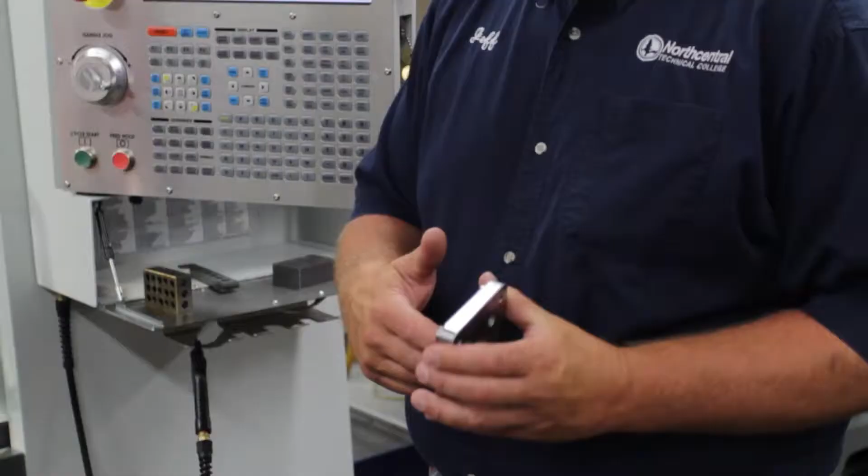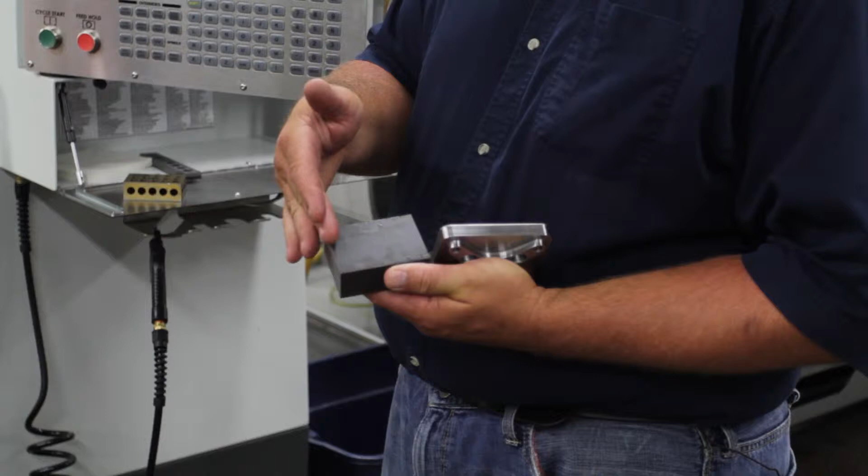Okay, this video will be going over the work offsets and the XY directions. I'll basically be covering 4 different types of origin pickups. We're going to go through a center of a hole. We're going to go through an edge of a block that would be finished. And then we're going to pick up off a rough stock, working off the center of the part, but also working off the edge, but offsetting the rough stock. And we'll go through that in a little bit.

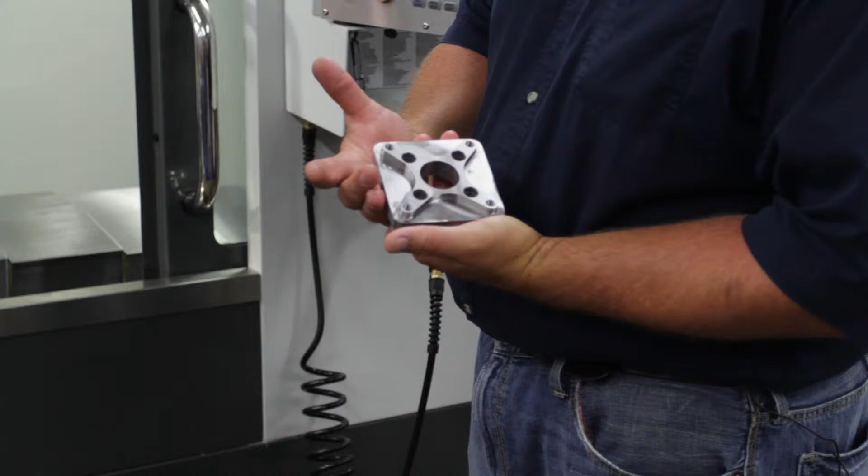First one we'll do would be the center of a part. Maybe we have a part that we already have and we have some more modifying to do. We have to drill some more holes and we want to pick up on the center of this part. The first thing you want to start with, obviously, is a square vise. Just like you have on the manual mills, you want to make sure you indicate your hard jaw in, make sure it's square to the machine. I've already done that, so we're going to skip that part today.

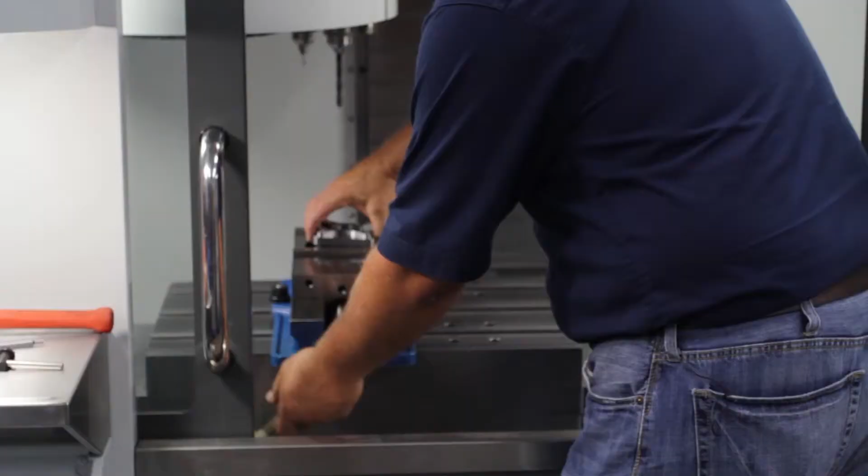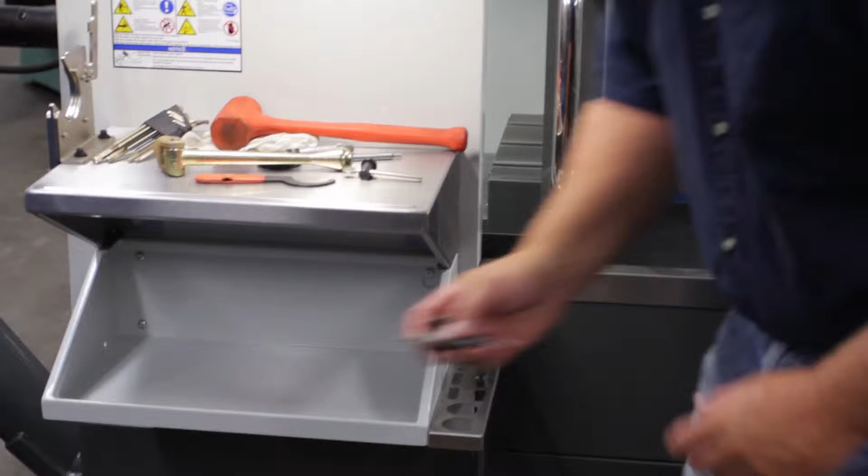So I'm going to mount my part in the machine, make sure it's nice and tight. And I'm going to use a drill chuck. You can use a collet, precision chuck, Jacob's chuck, but we're going to use the drill chuck. We're just going to mount our indicator in there. Just hand tight is tight enough.

And then we'll go into the machine, get into hand jog. We're going to move our machine into position. And I'm not going to do this just for the sake of the video. Once you get it in there, you're going to want to rotate your quill around until the dial reads 0 and it does not move. So once you have it into position and you have the center of that hole located, you want to go into your offset page for your work offset.

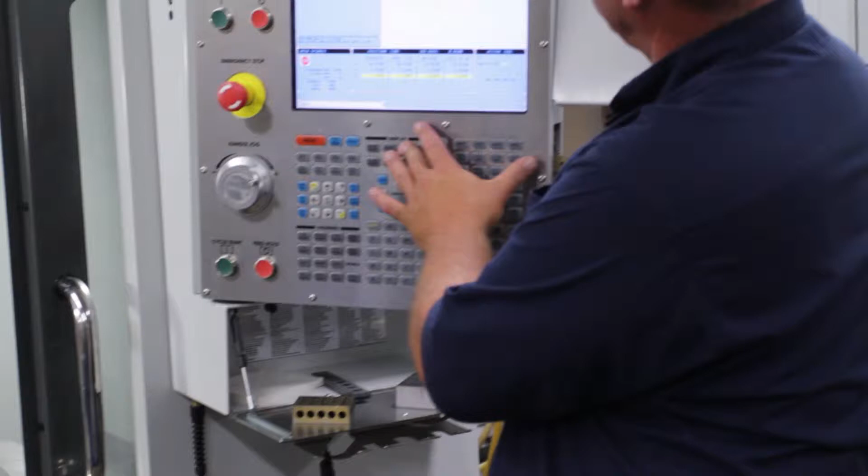Now in your program that you have written or you're going to write, you have to know what work offset number you're going to use. For the most part, we use G54. It's the most common one to use. So once we have the work offset page highlighted, you have the G54 and you have the X highlighted. You can rotate around using the arrow keys on which axis you want. So we're in the X axis and all you need to do is hit part 0 set. So that just set our X axis.

Now we're going to do the same thing for the Y. It automatically bounced over to the Y axis. We're still under G54. And now we're going to hit part 0 set again. So that would set your XY coordinate for the center of a part with the indicator where it is.

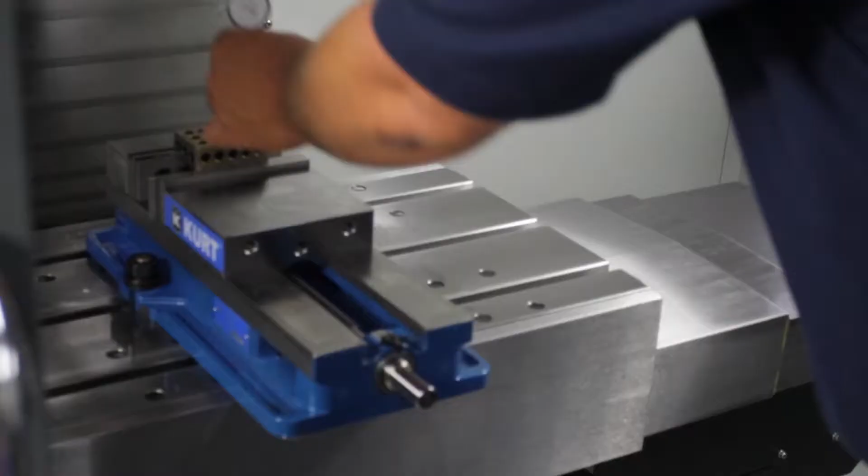So we're going to go ahead now. We're going to change up. We're going to do an edge find on a block that already has finished sides. So you mount your part in there. You can still use the same Jacob's chuck. And now we're going to use an edge finder. Here too, just hand tight is good enough. If you over tighten them, you end up breaking the edge finders.

Okay, so now we have to get our spindle rotating for this. If you had just turned on the machine, you probably can't just hit clockwise. It will not go. It needs an RPM in there. So the way you can do that is you go to MDI, type in a spindle speed, S800 for RPMs, M03, and you can input that on your screen.

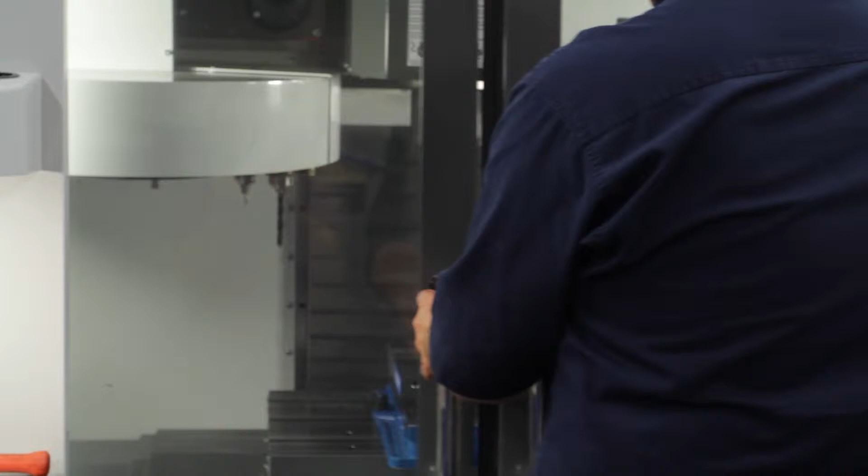And then once you have that, if you hit cycle start, it's going to tell you the door is open. So you do have to close the doors. And now we can hit cycle start. And our spindle turns on. Now in setup mode, you can open the doors and the spindle will maintain the 700 RPMs.

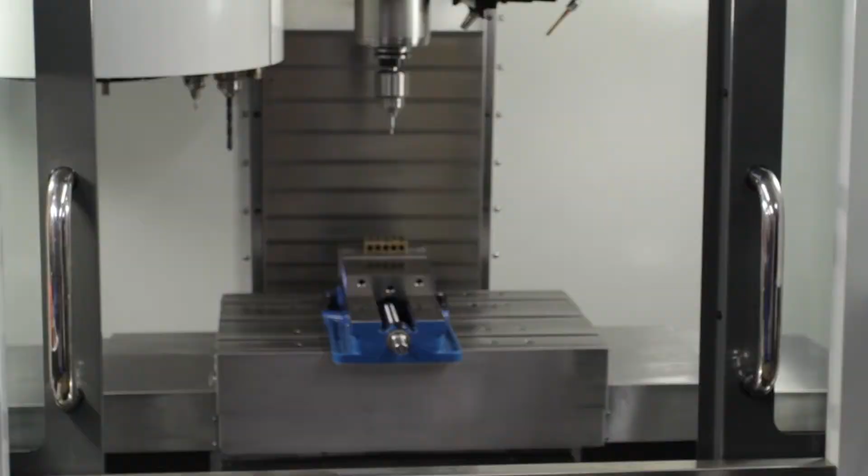Use extreme caution, safety-wise. You got a rotating spindle in there. You don't want to be doing anything that's unsafe. So you keep your hands away from the spindle. But from here, we can go into hand jog and we can move our edge finder into position. Careful not to bring it down on top of the part.

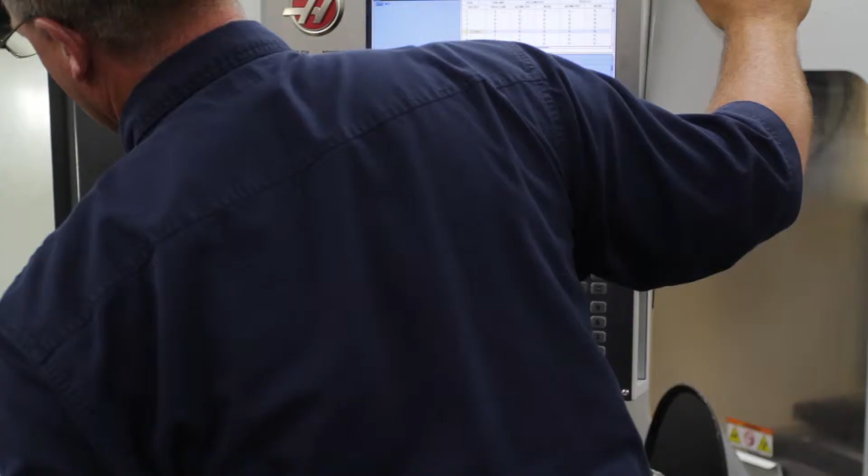Okay, so we're ready to do our X edge find. In hand jog, you want to be in the 1 thousandth increment, and then you go into the part until the edge finder kicks over. So there. So now our edge finder is just on the edge of the part, just like you have in all the manual machines. Once again, you're going to go to your offset page that displays your work offsets.

Now I'm just going to zero out our offsets from the previous part. So now we have our edge finder on our edge in the X direction. So here again, you want to be under G54 if that's what you have in your program. We're going to highlight the X. So now, once again, you're going to hit part 0 set.

So what that did is that set the center of our quill 100 thousandths off the edge of our part because of the 200 thousandths edge finder. Remember, you have to offset that 100 thousandths. It's always best to do that right away. There's two ways you can do it.

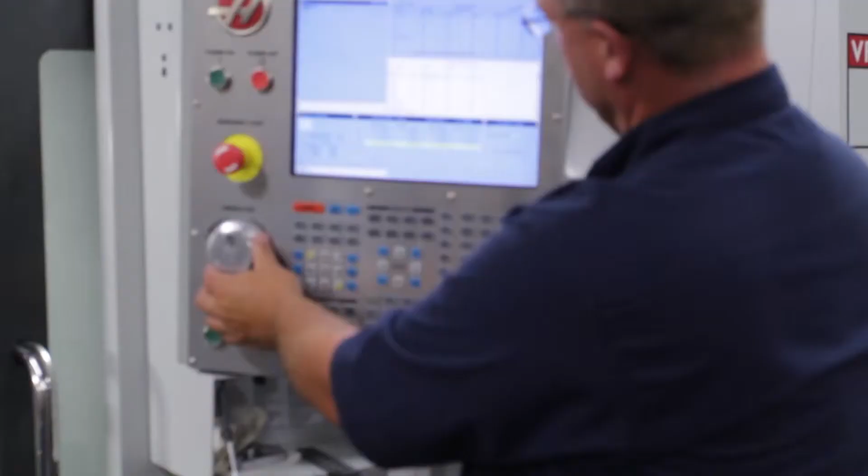You can lift your quill up and you can move your edge finder over 100 thousandths. Best way to do that is to go into 100 thousandths increment and just give it one click. Now you have to make sure you move in the right direction. So once you do that, you can hit part 0 set again.

The other way you can do it, the preferable way, I'm going to move back over. So that's right where the edge of our edge finder hit the part. You hit your part 0 set. And now you have to mathematically input the 100 thousandths.

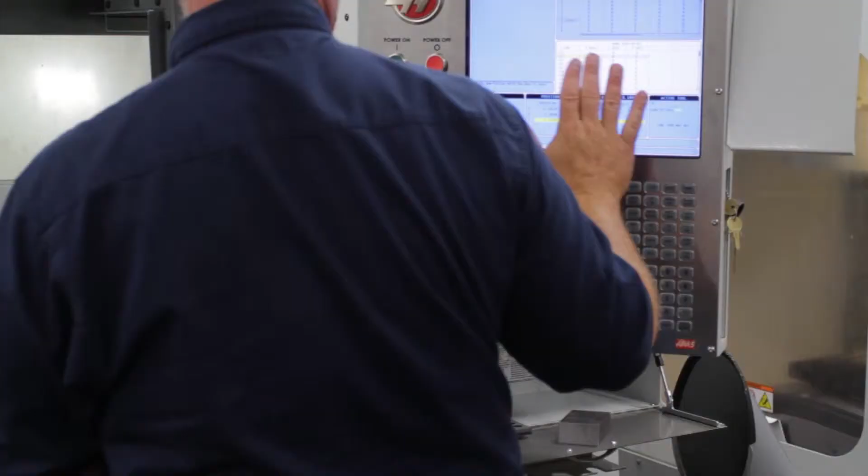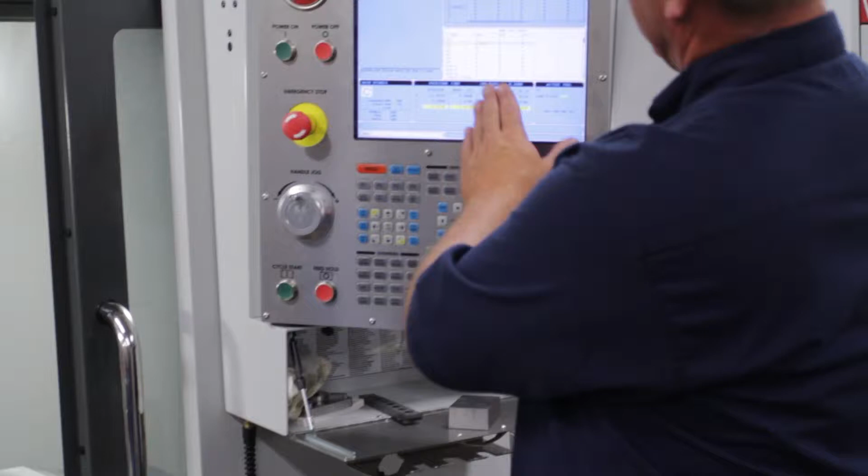Remember, this number, the negative 12.862, is off of machine home, which is up in this corner. So you got to think which way you want to move the quill. Do you want to move that quill closer to 0 or farther away from 0? In this case, we want to move it closer to 0, so we want to add 100 thousandths. So you have to make sure your axis is highlighted. And we're going to type in 0.1.

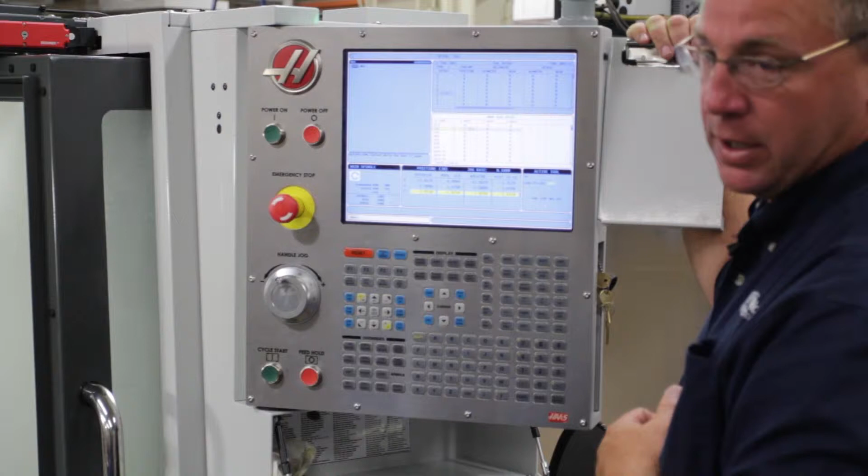And remember, this right enter button, that does the math for you. F1 would actually input 0.1. But in this case, we want the machine to do the math for us. We want to add 100 thousandths. So that just changed that to a negative 12.7620. Okay?

If our 0 is on this side of the part, we'd move our quill over until the edge finder hit. Once your edge finder hit, you do the same thing. You're going to hit part 0 set. Okay? Don't forget that this automatically jumps over, so you have to use your arrow keys to highlight the X.

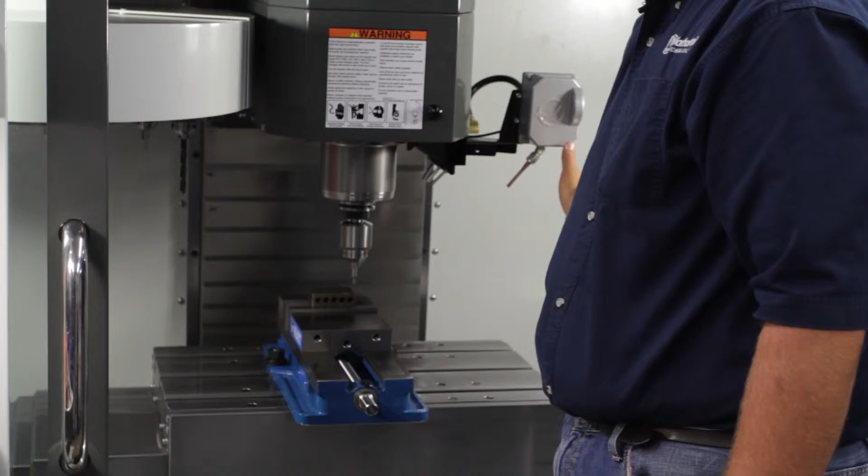But now this time we want that quill to move away from machine home 0. So we want to go farther away from 0. In that case, then, we have to subtract 100 thousandths. And you hit write enter, and it does the math for you.

The process is the same way for the Y direction. Bring your edge finder up. Sometimes it is helpful to hit it and get it out of center. Okay, so right there's our edge. So you go back into your offset page. If you're not on the work offset, you can just hit the offset button again, and it'll bring you right to it. Make sure you got G54 highlighted.

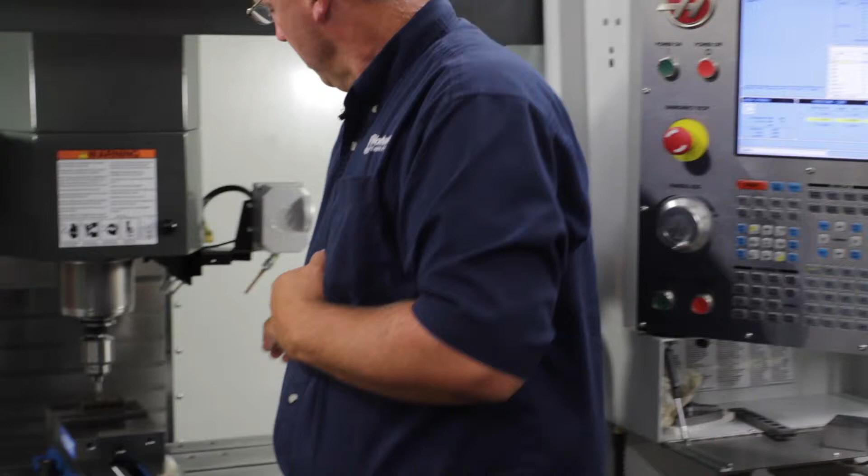And we're going to go to the Y axis. You hit part 0 set. Okay? So now we have to offset for the 100 thousandths for the edge finder. Machine home is up here. In this case, we want to go farther away from it, so we have to subtract 100 thousandths. Make sure our Y is highlighted. Minus 0.1, so we want to go farther away, and do the write enter. Okay?

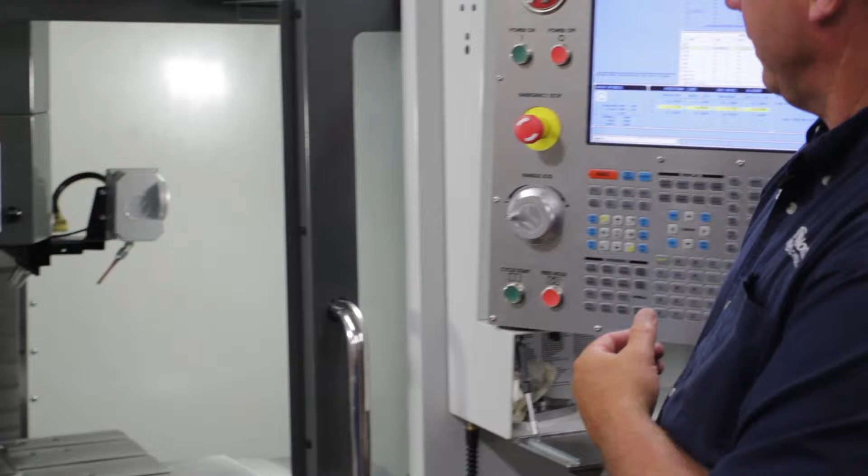If our 0 is on this side of the part, which generally you don't want to do, because remember, you always want your Y0 along your hard jaw. But let's just say for some reason it is on this side of the part. We'll work our edge finder up to it. Once it hits that out of center, you hit part 0 set. And now this time we want to go closer to 0, so we're going to want to add the 100 thousandths. So you go 0.1, write enter. Okay.

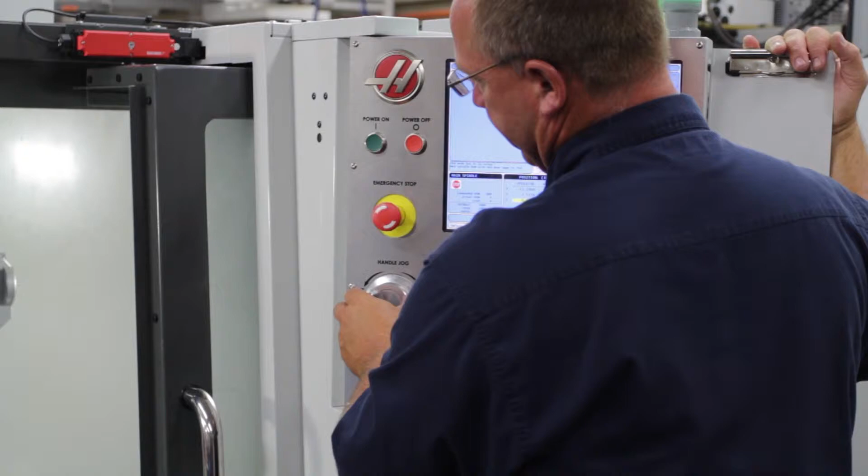So that's how you find your edge off a finished part. Now we're going to work with some rough stock. Let's change the part out here quick. So we got our rough stock mounted in our vise. First one we'll do is we'll pretend that the center of the part is our XY0. So you want to make sure you can offset your X and Y properly, so when you machine around the whole part, you're taking stock off and you have a finished, nice, clean part at the end.

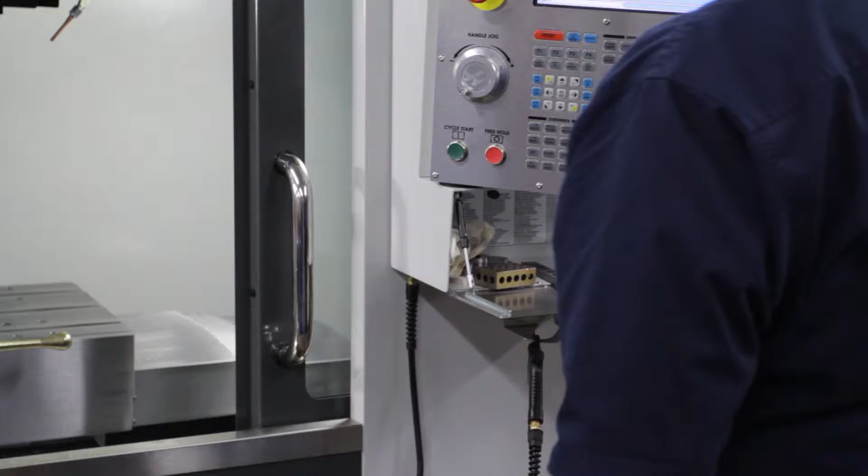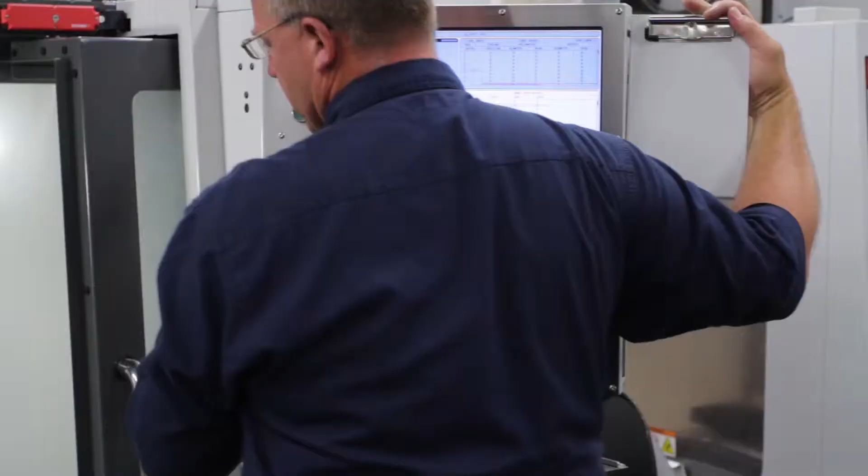I'm just going to go and zero out my offsets here. Now that I got part in there and ready to go, I'm going to do an edge find. So turn my spindle back on, 0.001 increment. I'm going to come over there until my edge. Okay, right there it is. So that's the edge on the left side.

Now my program, I'm going to use G54. Remember, if you're using G54, it does not matter what's in all the other work offsets. There's 100 some work offsets in there. It does not matter what's in there. You can either write this number down off your machine home, but I actually just like putting it in right in the machine. That's why it's in there. I don't have to worry about copying it wrong. So I'm just going to hit part 0 set under G55.

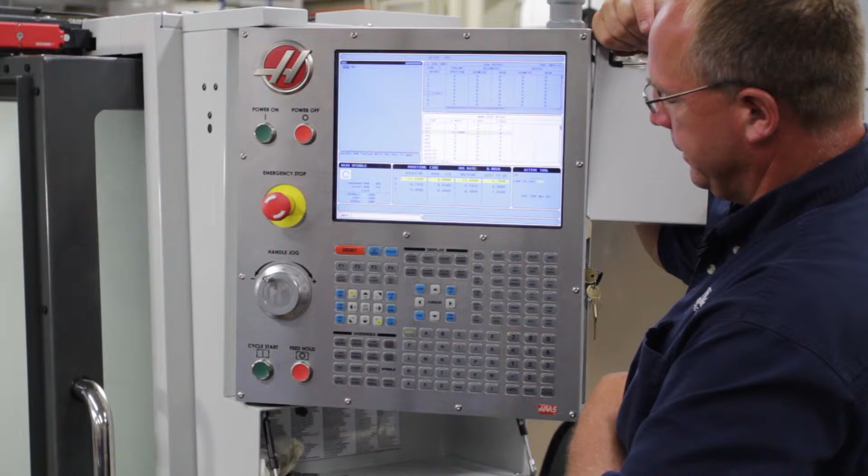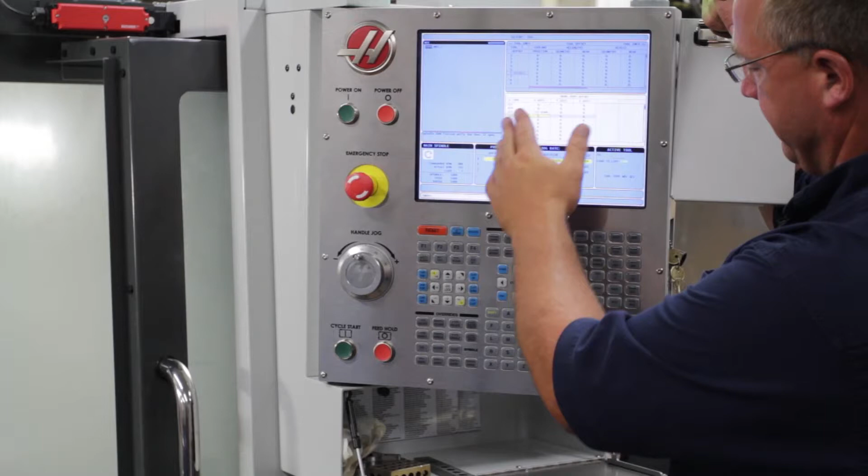Okay. Now I'm going to hop over to the other side. I'm going to raise my edge finder up, come to the other side, drop it back down, 0.001 increment. So that's my edge on the right side. Go back to my offset page. I'm going to go under G56 this time. Okay? I'm going to hit part 0 set. Okay? Now, I have, according to machine home, where this edge is and this edge is.

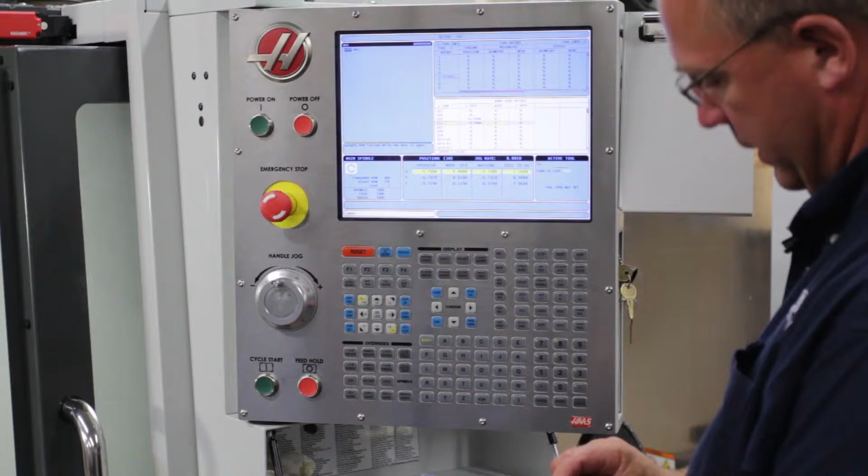So I go into my G55 and 56. Basically what I'm doing is just looking for the number that's in the exact middle of that. So I'm just taking a calculator, going 12.694 minus 9.39. Divide that value by 2 and just add it to the smaller number, so 9.39. So the exact middle is negative 11.042.

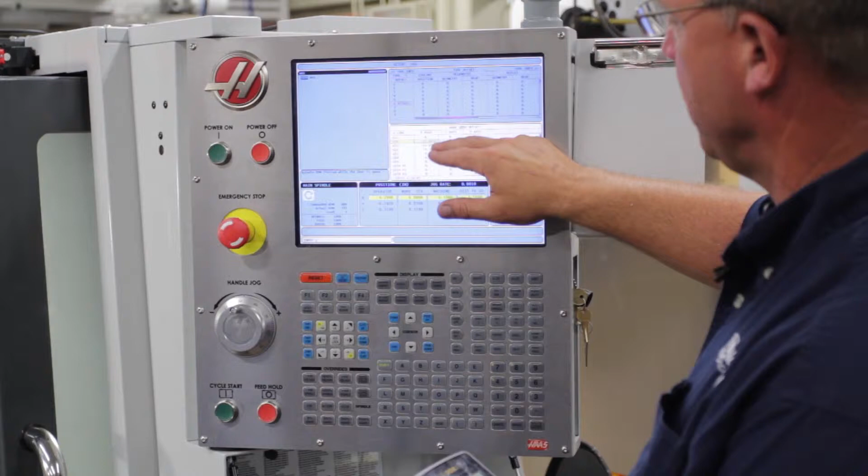So I'm going to go up G54 under my x-axis and type in negative 11.042. And now in this case, we want to hit F1 because we want to input that value that we typed. So you want to actually look at this number, just make sure it makes sense to you. Is that number in the middle of those two numbers that I have written down? And it is. So that's the center of our x. Now we're going to do the same thing for the y.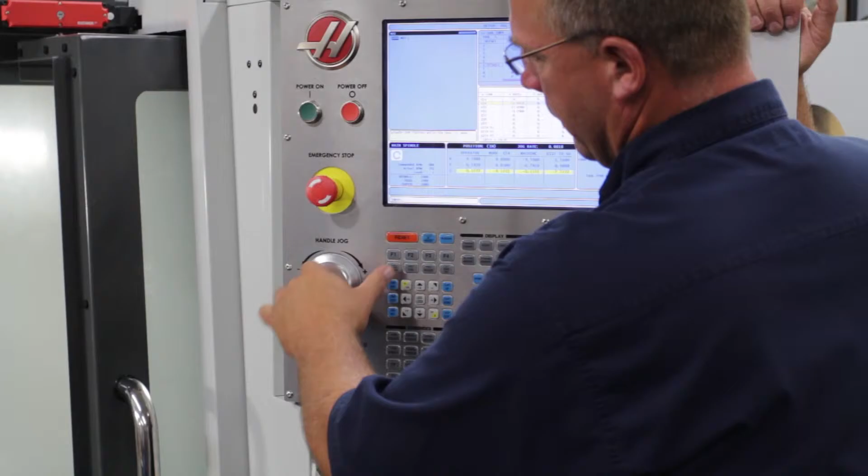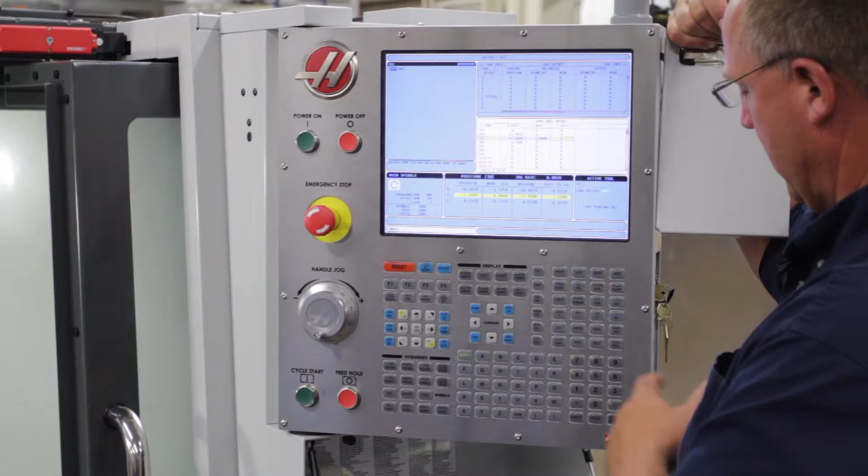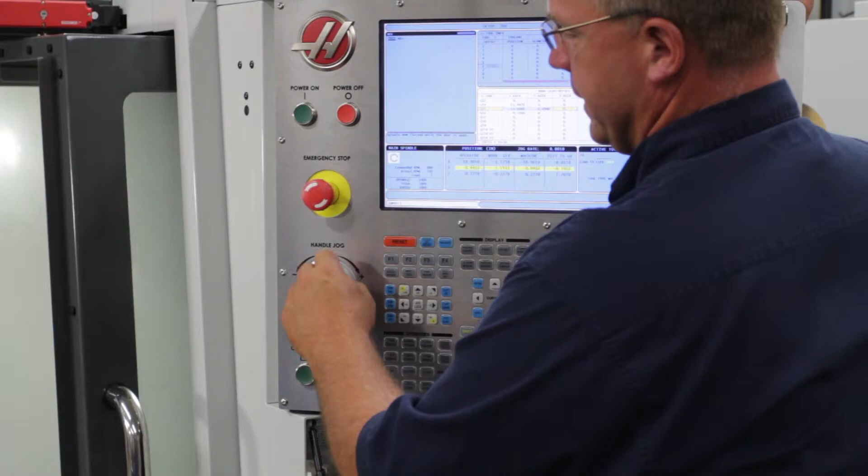Bring it up. Move over to about the center. Kicked over. Here too. Go back to my offset page under G55. I'm going to hit part 0 set. Okay? Pick it up. Come to the other side. Find the edge for this side. Okay, there it is. Back to my offset page under G56. We're going to hit part 0 set.

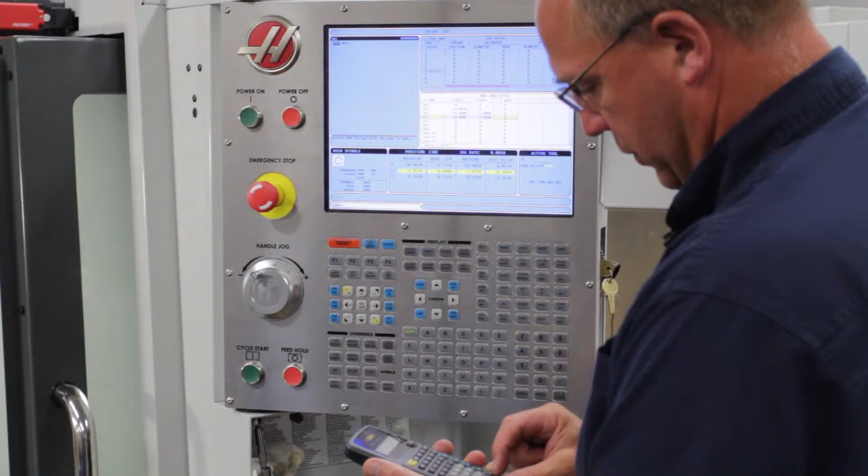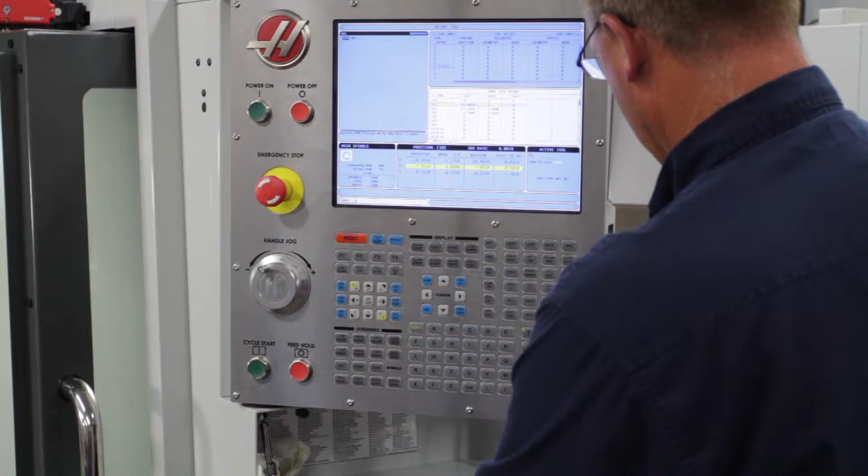So now, take our calculator again, find the middle of those two numbers. So we have 5.49 minus 7.955. We're going to divide that by 2 and add it to that smaller number. So negative 6.7225 is the exact center of that part. So I'm going to put negative 6.7225. And we're going to hit F1. Okay? So that's the center of that Y.

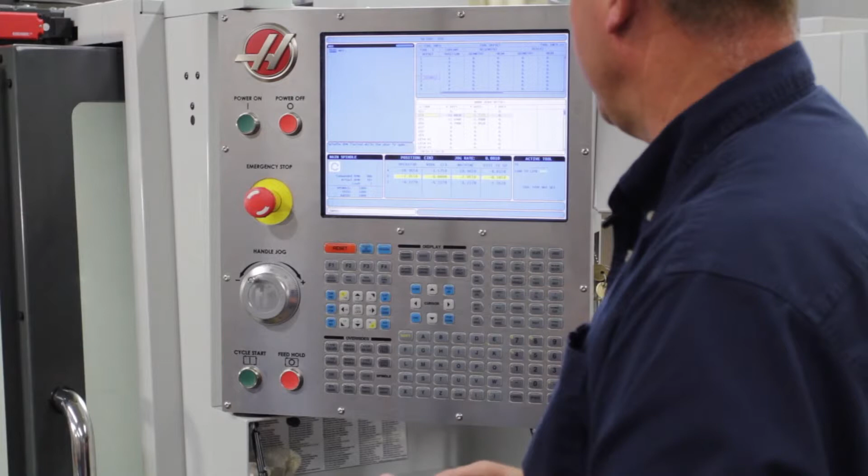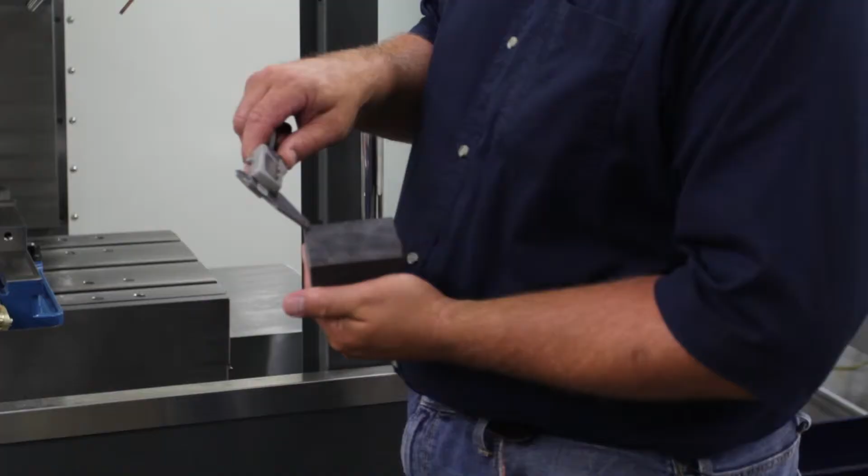When you're punching in these numbers, always make sure you have a negative. They're always going to be negative numbers because you're working off of machine home. You're never going to have a X or Y positive value here. So that's how you find the center of a rough stock part. Okay, so now we're going to find our XY0 off the corner of our rough stock, but we want to make sure that we have enough material all the way around to clean up the whole part.

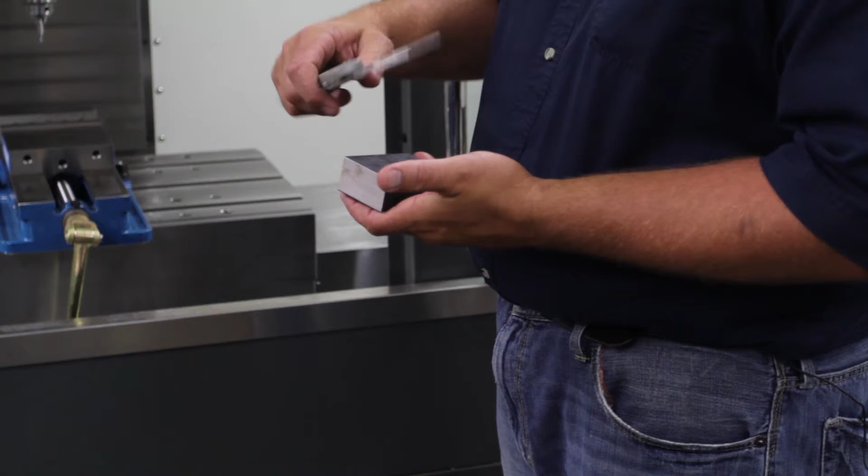So for this part, our finished dimensions are 3 inches by 2 inches. So what I'm going to do is I'm going to measure my part and just get a rough measurement, it doesn't have to be real accurate. So it measures 3.1 that way and 2.25 that way.

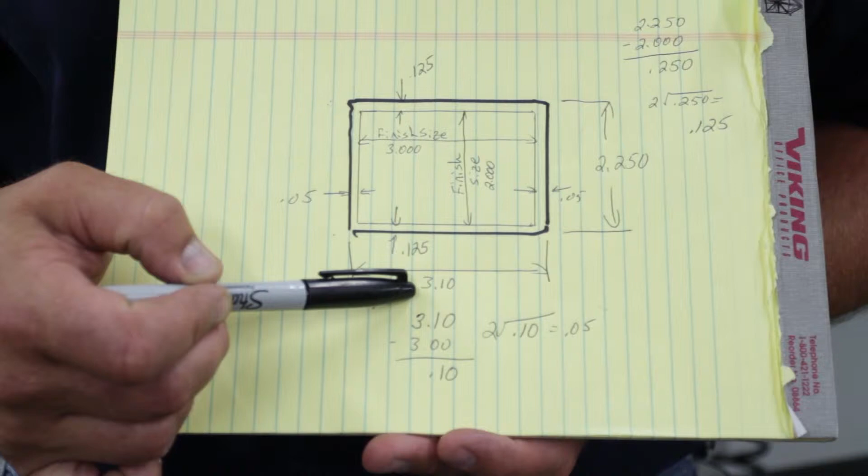So then what you want to do is you want to do a little math. I know my rough stock is 3.1, my finished stock is 3 inches. So you subtract the two and find the difference. In this case, it's 0.1. And you divide that by 2. That means I want to take approximately 50 thousandths off this side and 50 thousandths off that side.

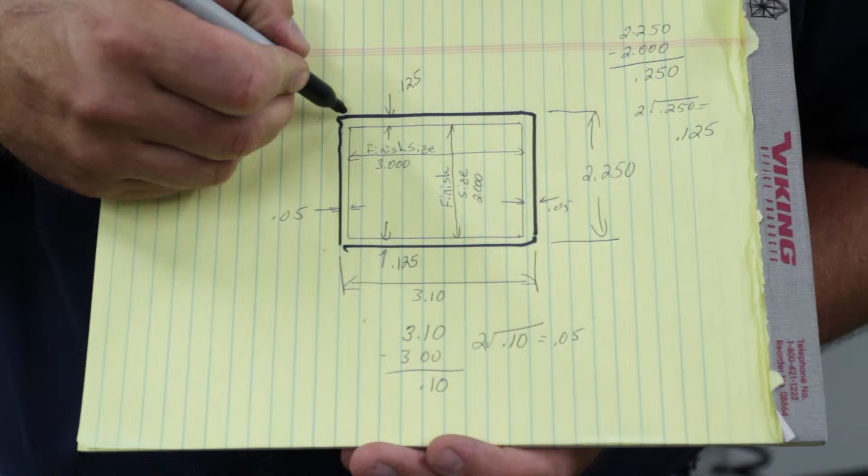So when we do our edge pickup, if this here is our 0, we come over here with our edge finder. We want to do 100 thousandths for our edge finder and then 50 thousandths for our rough stock.

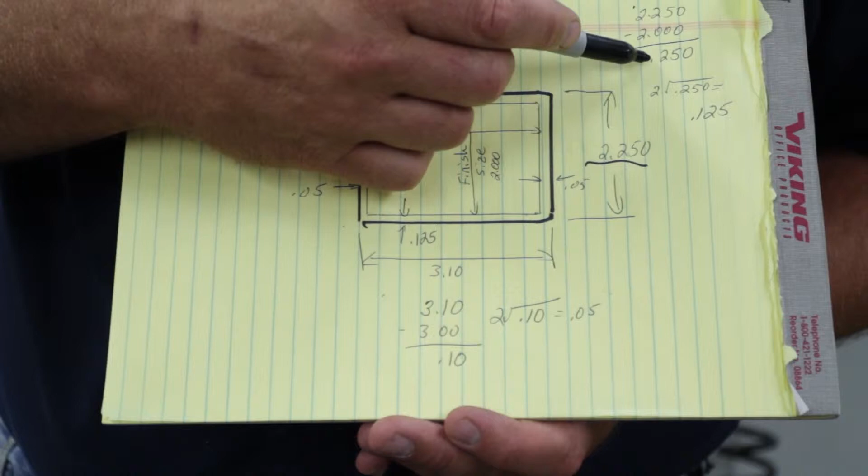In the Y direction, our rough stock is 2 1/4. So up here we're going to do our math. 2 1/4 minus 2 inches, which is our finish. That leaves us with a 1/4 inch. Divide that by 2. That gives us about 1/8 of an inch.

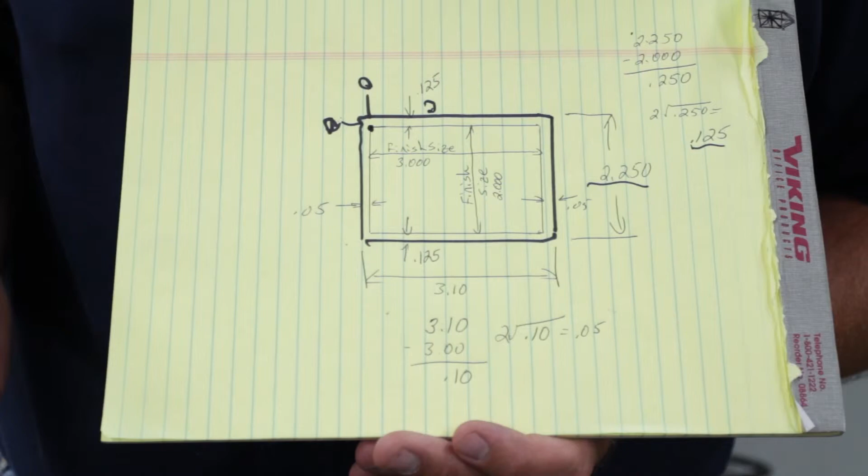So we come up here and do our edge find. We're going to do 100 thousandths for our edge find, and then we're going to do 1/8 inch for our rough stock. And that'll put our XY0 basically inside of our rough stock. Okay? So we'll just go through that real quick. I'm going to go ahead and just zero out all of our offsets from the previous part.

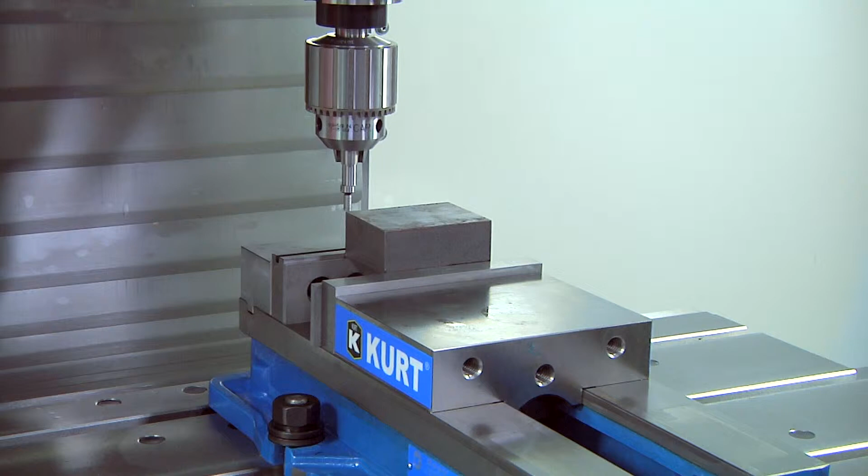Okay, so now we have our rough stock mounted in our vise, and we're ready to pick up our edges for the X and Y in the rough stock in the upper left-hand corner. So I'll get my quill or edge finder in position. And we're going to turn on our spindle and bring our edge finder up to the edge of our part.

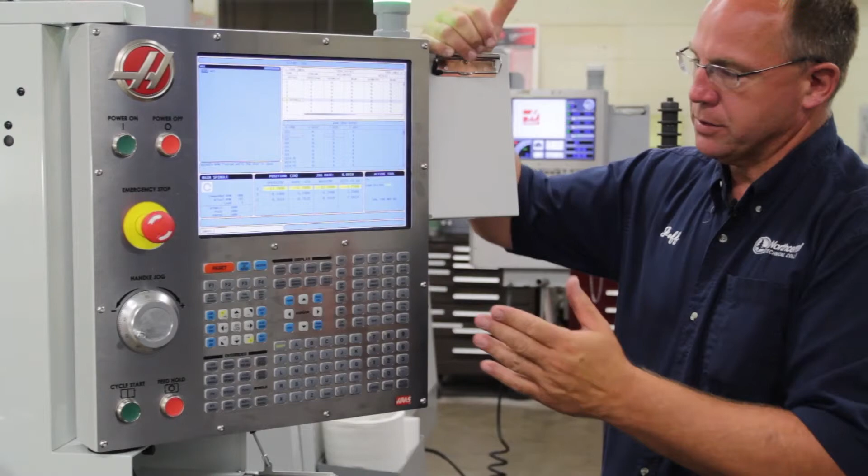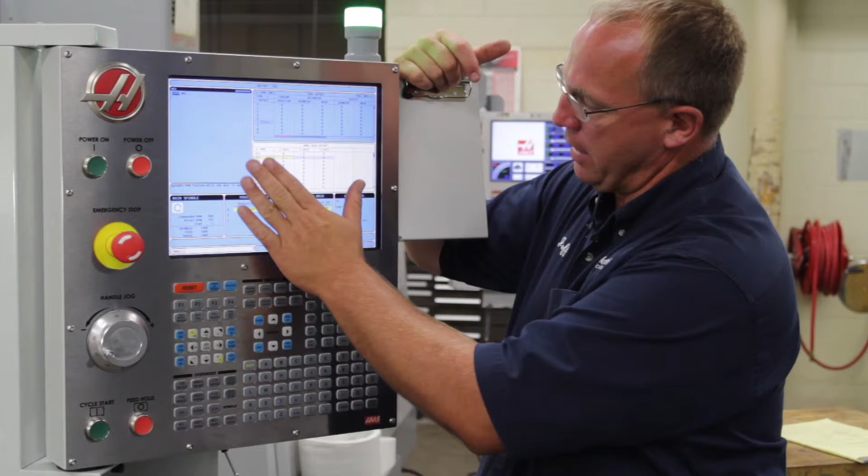Okay, so there it goes. Okay, so we have the edge of our edge finder on the edge of our part. We're going to hit the offset button so we make sure our work offset page is up. We're working with G54 and we're working with the X-axis. So once we have that all set, you hit part 0 set. Make sure you go back to the X because now we have to do our edge finder.

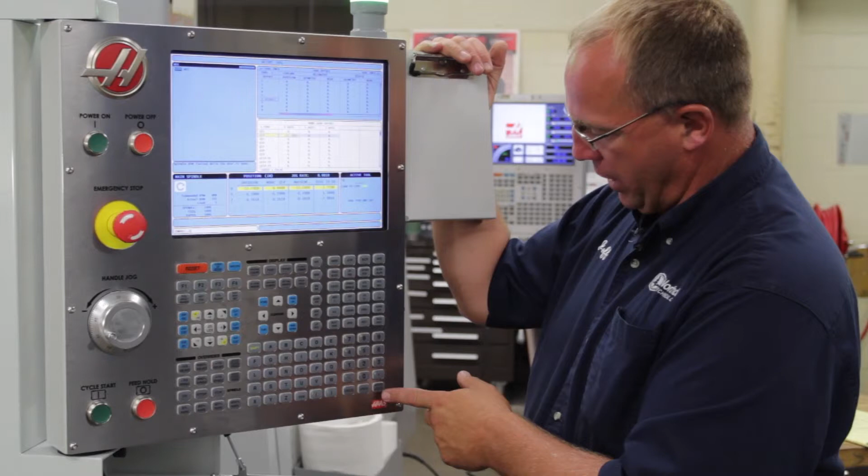And here too, because our machine home is in the upper right-hand corner of the table, we want to get closer to machine home, so we want to add these numbers. So we're going to add 0.1 for our edge finder, right, enter, okay? But now we also have to do our rough stock. And if you remember from a little bit earlier, we need to do 50 thousandths.

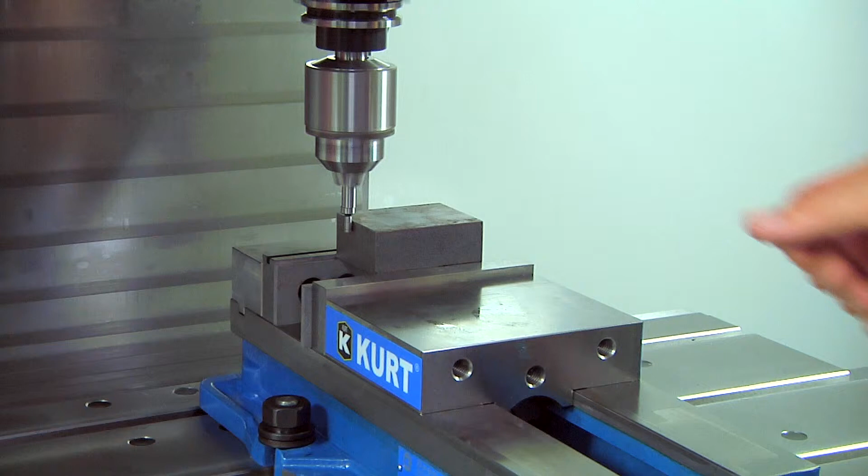And here too, we want to move that closer to machine home, so we're going to go 0.05, and it moves that 50 thousandths inside our X0, 50 thousandths inside our rough stock. So now when we machine around the whole part, it'll take 50 thousandths off here and 50 thousandths off there. So now we're going to do the Y-axis.

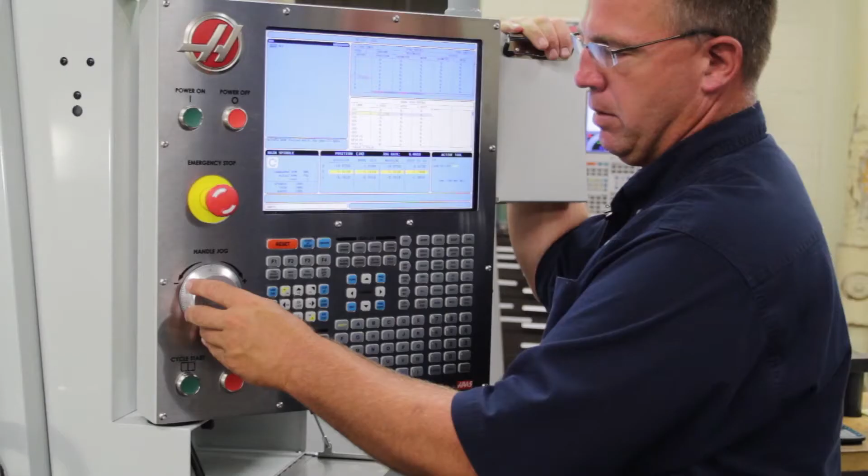Move our edge finder into position. Bring it down. So now our edge finder's right on the edge of our part. We're on G54 in our work offset page. Make sure our Y-axis is highlighted. And we're going to hit part 0 set. Make sure we use our arrow keys to get over underneath the Y-axis.

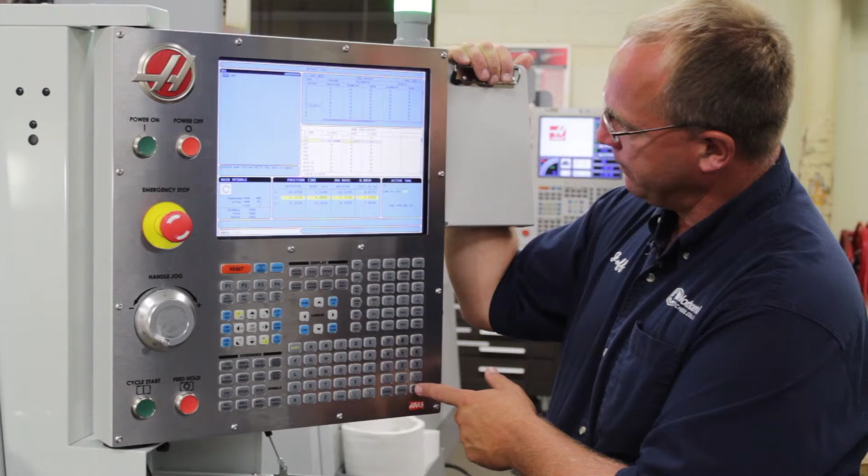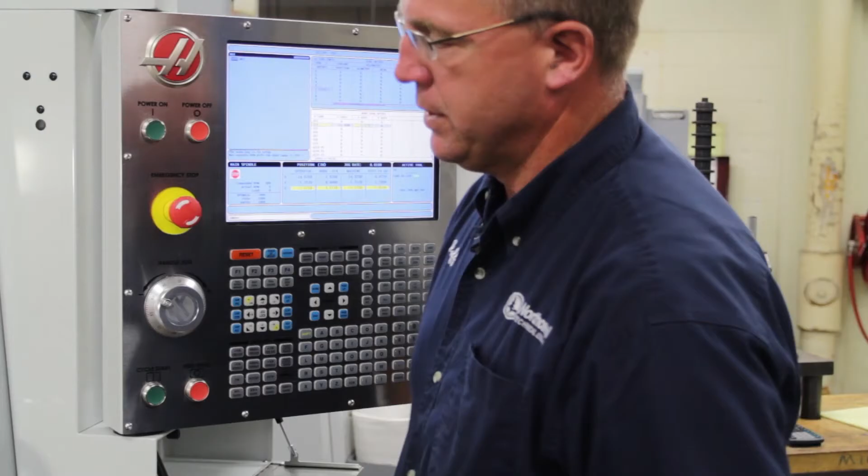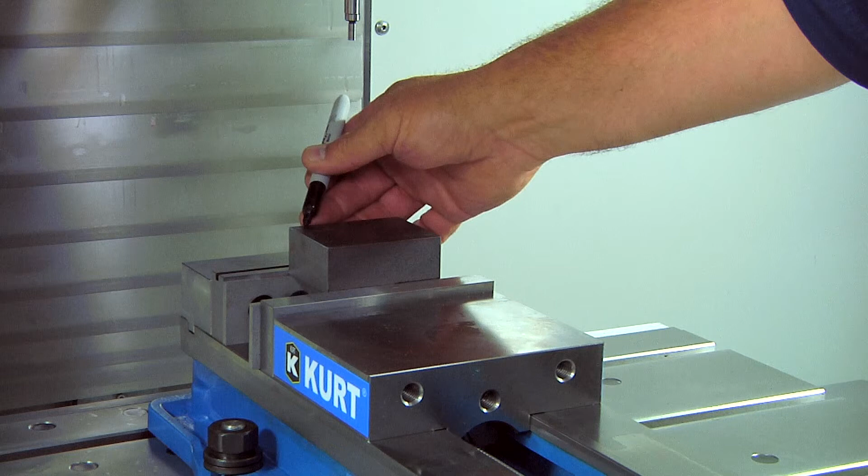Do our edge finder. We want to go farther away from machine home, so you want to subtract the 0.1. And now we also want to subtract the 1/8 inch from measuring our part. So we want to do minus 0.125. So that sets our X and Y coordinates for the rough stock, and our XY0 is actually up in this corner inside of our stock. So when we machine around this, it's going to take material off here, here, here, and there.

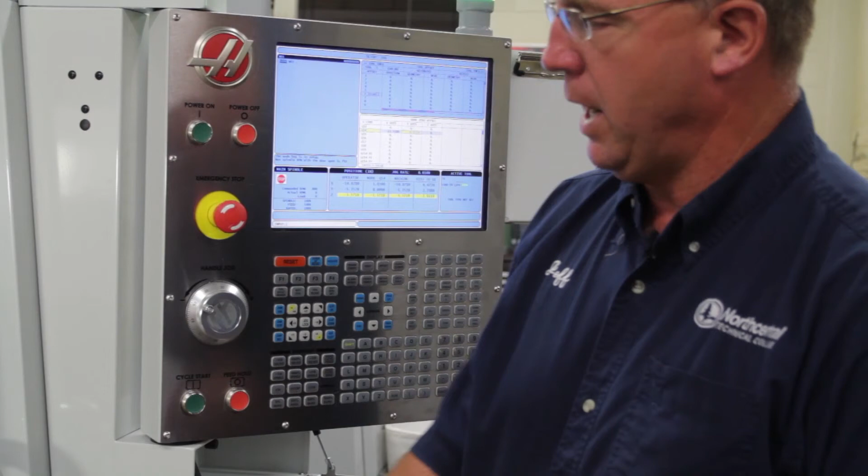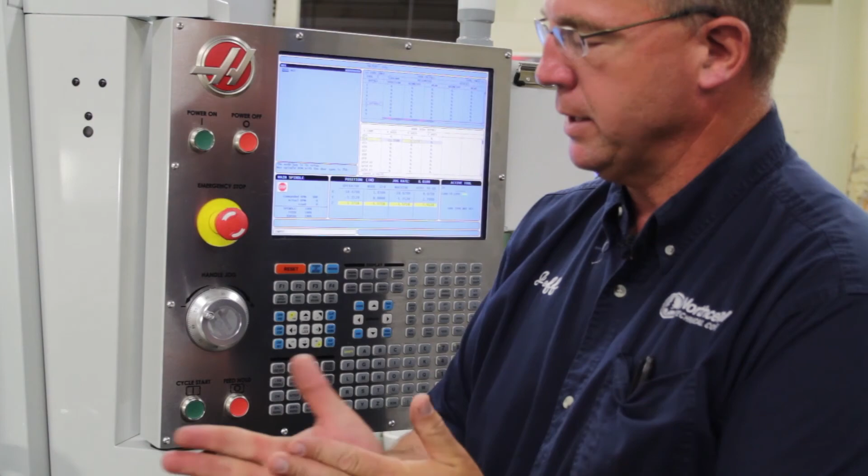So that's the 4 methods of finding your X and Y positions on your machine. All of our projects basically use one of those 4 methods. So if you ever do get stuck on how to do something, you should be able to revert back to the video.